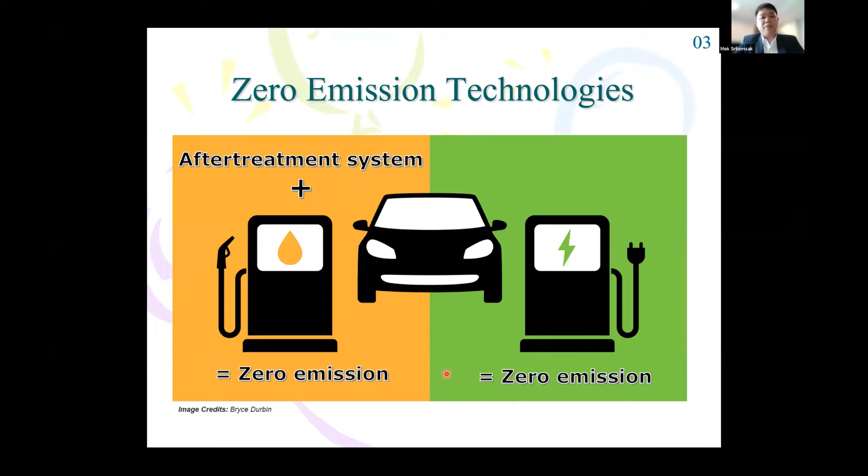And another way, if we want to keep using our internal combustion engine, we need to equip it with after treatment systems. Then we can obtain almost zero emission as well. So this is my point of view about this. Therefore, we come to talk more about the after treatment system that I mentioned. Internal combustion engines can be gasoline engines and diesel engines. But our group is more familiar with the diesel engine, therefore we decided to pick this part to share with you today.

First of all, the main emissions from the diesel engine. In addition to carbon monoxide and hydrocarbon, which can be treated, there are particulate matter, or PM, and nitrogen oxides. Another component in the diesel exhaust gas is rich oxygen content, because the engine is operated under ultra lean burn conditions, so oxygen is available in the exhaust pipe. For those toxic emissions, in developed countries like Japan or in Europe, there are many technologies available to take care of these toxic gases and particles.

This bottom left picture shows the full after treatment system, including the diesel oxidation catalyst, where hydrocarbon and carbon monoxide can be treated, and nitrogen monoxide can be converted into nitrogen dioxide, NO2. Another piece of equipment is the DPF, where black smoke or particulate matter can be trapped with 98 to 99% filtration efficiency, and selective catalytic reduction, where nitrogen oxides can be reduced into nitrogen gas and water using ammonia. And lastly, ammonia from the SCR can be treated using the ammonia slip catalyst, ASC.

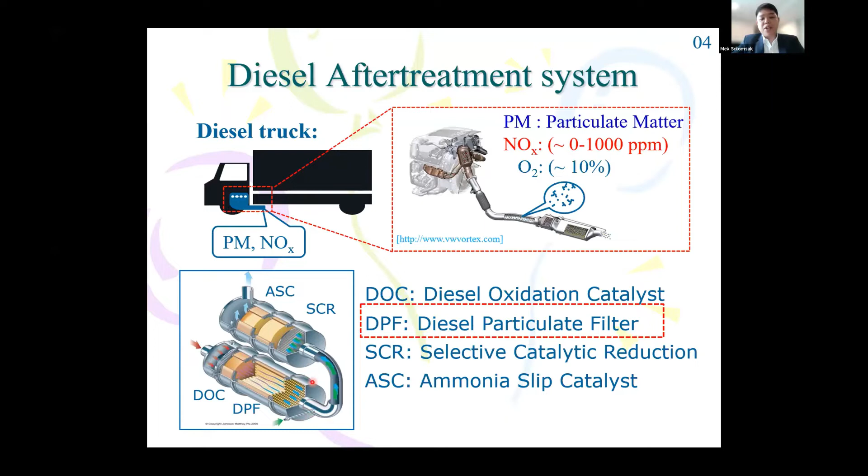To be more specific about the topic I'm going to talk about today, among the equipment, I will focus on the one we can use to reduce particulate matter emissions, which is the DPF. It stands for diesel particulate filter. It's located in the exhaust system of the diesel engine. There are two main steps of DPF operation. The first one is the trapping process, where the exhaust gas carrying the PM is forced to pass through a honeycomb structure of the filter with alternate end blocks, meaning that if one end is open, the other end is closed.

Therefore, the exhaust gas and the PM are forced to flow through a channel and through a porous media wall, and then the PM will be trapped on the wall. This is the trapping process. And after the filter is clogged, after being used for some time, the filter needs to be regularly cleaned through a regeneration process, where we increase the exhaust gas temperature and burn out all the trapped PM. The picture below is just a schematic diagram of the after treatment system I mentioned earlier, showing which gas is treated after passing through each device. I will just skip it.

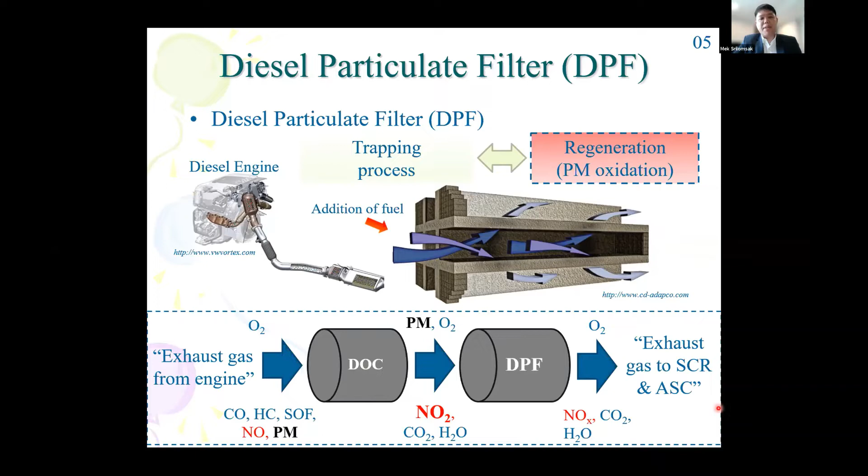But the current issues in DPF systems can be mainly two parts. The first one is ash formation clogging the filter after being used for some time. This ash is incombustible material, and after each regeneration burning the particles, it will accumulate at the end plug or around the surface of the filter. It will limit the service lifetime of the filter. So the movement of ash, or movement of the PM during filter regeneration, is to be studied.

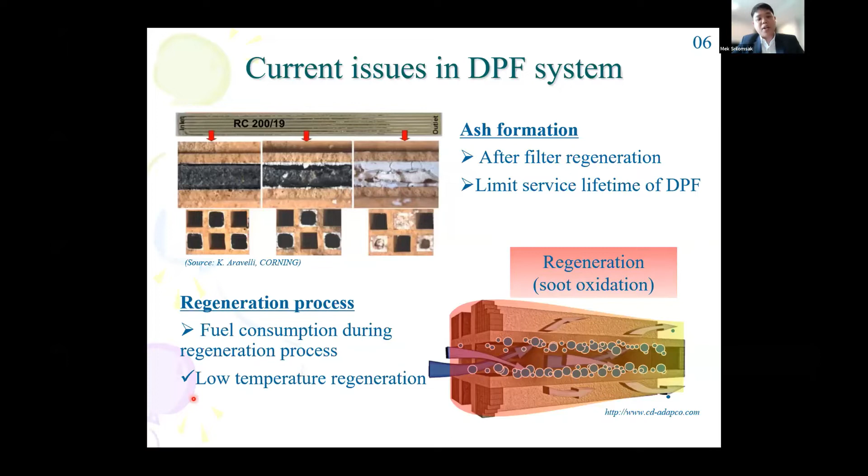Another issue is the regeneration process, which requires consuming fuel to increase the exhaust gas temperature. Therefore, fuel consumption is an issue, and a lower temperature of regeneration can be an interesting issue to be improved. So let's come to our research goals.

Our research interests have two main parts. First is the microscopic phenomena studies of PM regeneration, the PM oxidation or DPF regeneration process. Another issue is the relationship between each toxic gas. NO2 alone is toxic, PM alone is toxic, but combined they can result in PM reductions. I will show you, but probably we need to go quick.

This research was done when I was in Japan. We prepare a small size sample instead of using the commercial size DPF, because we want to study the microscopic phenomena inside. We prepare the small size sample like this, flow the exhaust gas through, and trap PM in each alternative channel.

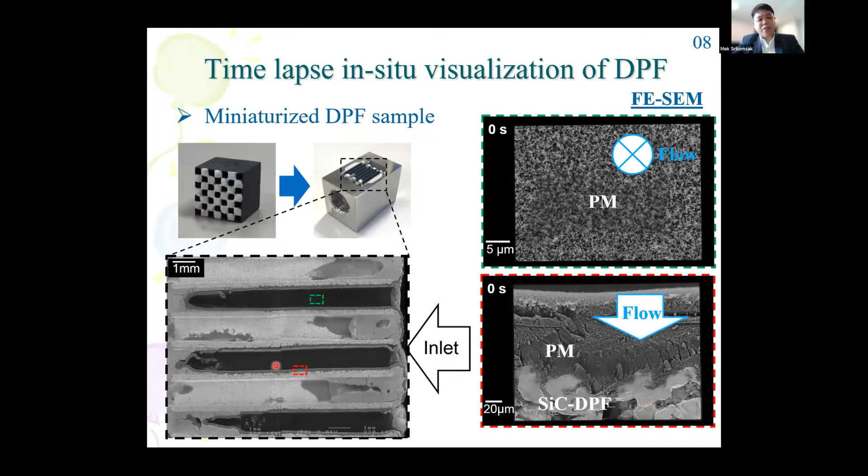Then if we use the scanning electron microscope to observe each channel, we can see the microscopic picture, shown on the right-hand side: surface view of the vertical wall, horizontal wall, and the lower one is cross-sectional view of the vertical wall.

I want to introduce some more information about the PM. This is about the hierarchy in length scales of the PM.

After we see the PM accumulated on the filter substrate like this, we zoom in more and can see the PM layers as a random shape. If we pick up the small particles and use the TEM to observe, it shows to be the...

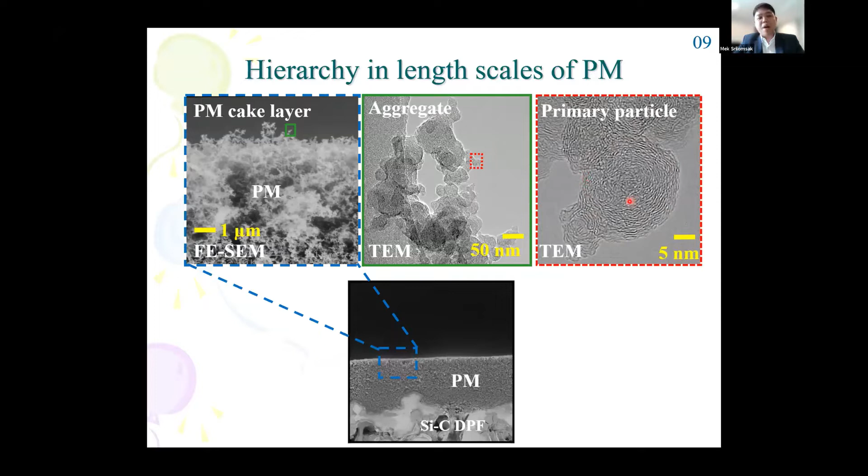Aggregate particles, nanoscale, look like this. And if we zoom in more in the red area, we see the smallest scale that can be defined as a particle, called primary particle. I just want you to get familiar with this hierarchy so we can show you more results.

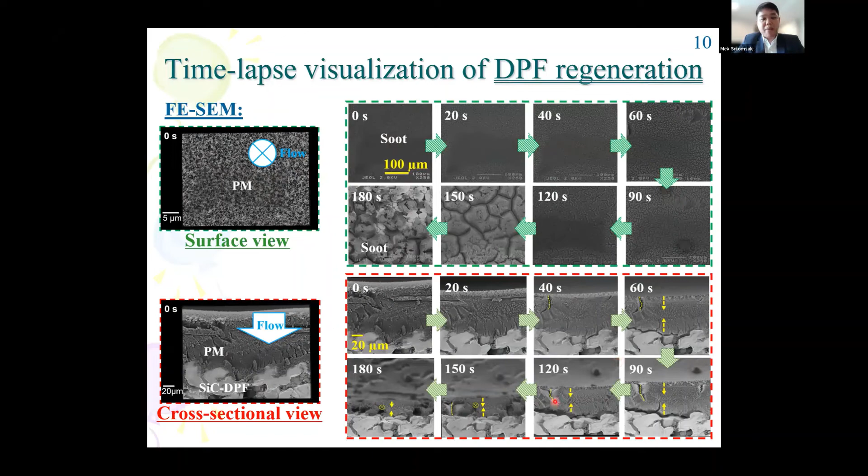First, we do the time-lapse visualization. We partially oxidize the PM trapped on the surface of the filter and see how it changes in the surface view and the cross-sectional view. I will go quickly and show you the conclusions of our studies.

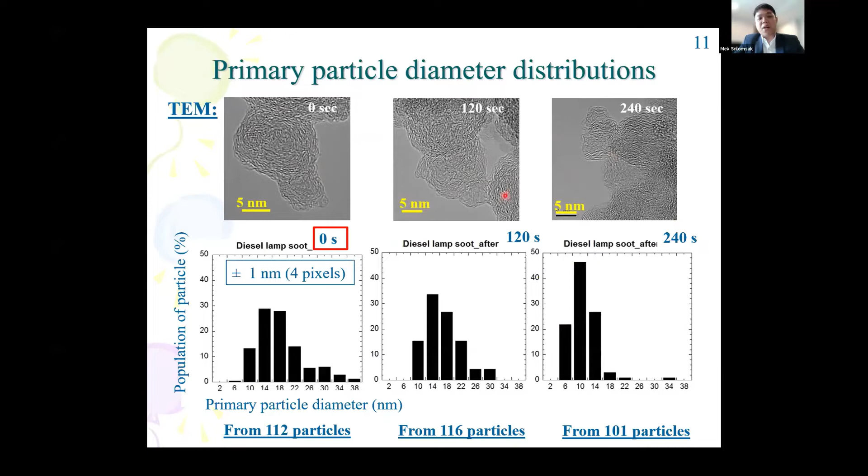Not only the microscopic scale in micrometers, we also pick up some primary particles to see the change after partial oxidation in the nanoscale. We plot the particle size distribution against the number of particles counted, and as a result, we can see that the particles tend to get smaller after partial oxidation.

This is the conclusion of our finding: after soot is trapped on the DPF, each primary particle tends to get smaller, which makes the aggregate get smaller, and makes the cake layer of aggregate accumulation get smaller. We call this the shrinking phenomena of the DPF after regeneration. So we can conclude that shrinking phenomena is a physical phenomenon that happens during the DPF regeneration process.

I'm not sure time allows, but I will try to continue a little bit more. We also made a finding to understand the relationship between NO2 and PM, using the concept of the Arrhenius expression.

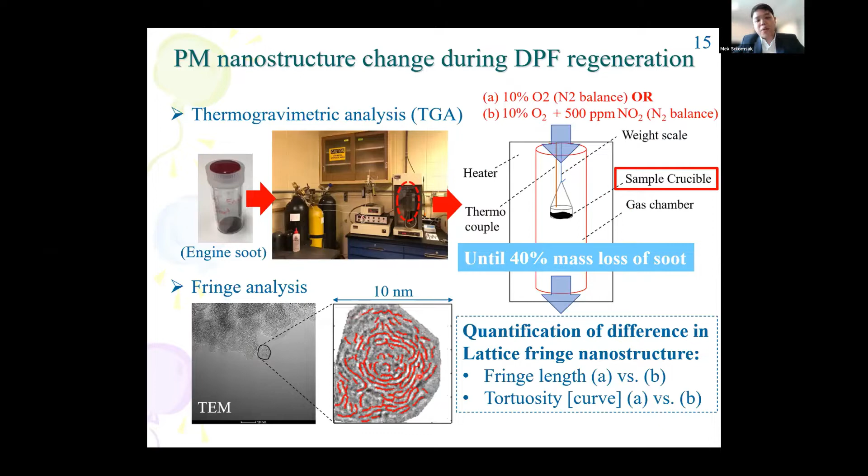We also propose a way to study the nanostructure change of the soot primary particle when we add NO2. I think the time is limited, so I will just go to the conclusions that we found.

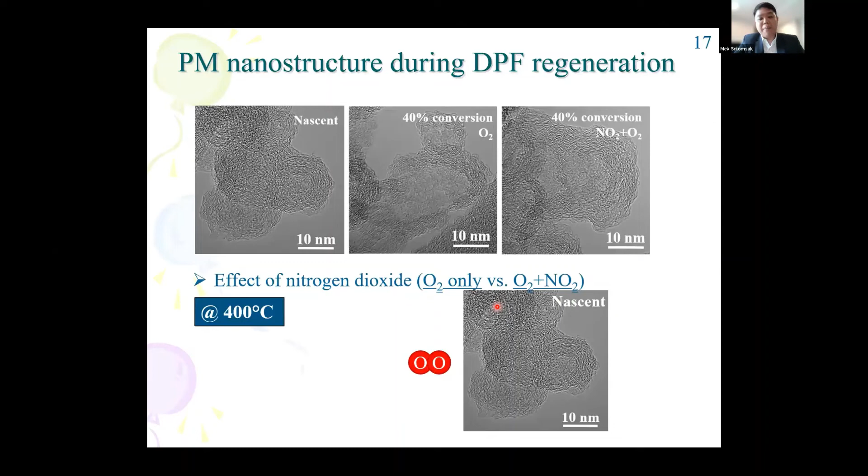I made this animation for the conclusions: if there is no NO2, oxygen tends to penetrate to the core of the particle and then burn out the primary particle from the inner side. Therefore, we can see a hollow structure like this, and this results in carbon dioxide.

But with nitrogen dioxide, it will make the edge of the primary particle more reactive. We have quantitative data for these conclusions. Oxygen will not tend to penetrate into the core, but instead oxygen tends to react with the shell of the primary particle, resulting in carbon dioxide. So this is our finding.

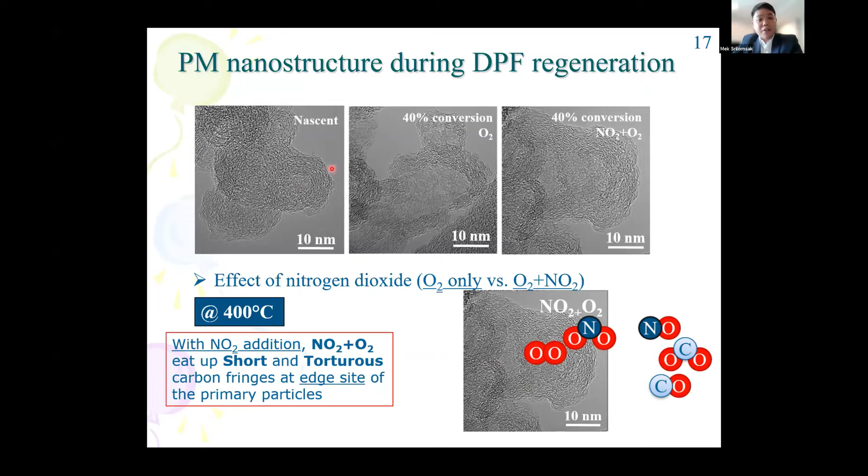We can say with NO2 addition, NO2 plus oxygen eat up the short and tortuous carbon fringe structure at the edge site of the primary particle.

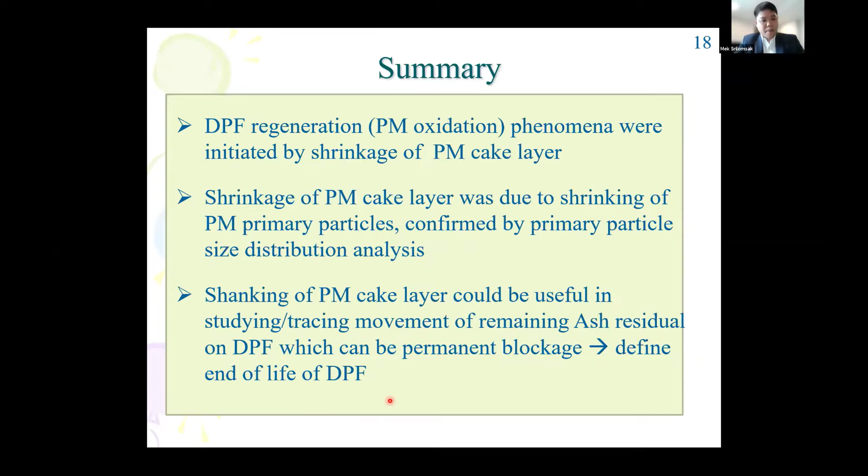So I will do the summary of my talk, sharing the idea with you today. I found that DPF regeneration phenomena were initiated by shrinking of the PM cake layer, initiated by the shrinking of the primary particle. The shrinking of the PM cake layer could be useful information for tracing the movement of the remaining ash residue in the DPF, which can define the permanent blockage, because the blockage of the ash can affect the service lifetime of the DPF. So if we know how the PM is moved, we know how ash is moved, and probably we can decide to make the blockage less.

Another summary of myself is the role of nitrogen dioxide on PM oxidation could be confirmed using the activation energy, which is chemical evidence, and another physical evidence is nanostructure change. So I propose that nitrogen dioxide plays a catalytic effect on PM oxidation at temperatures lower than 500 degrees Celsius, as chemical phenomena. The nanostructure change after adding NO2 was that the short and tortuous carbon fringe around the surface of the soot primary particle disappeared. Therefore, this is a physical phenomenon for the conclusions.

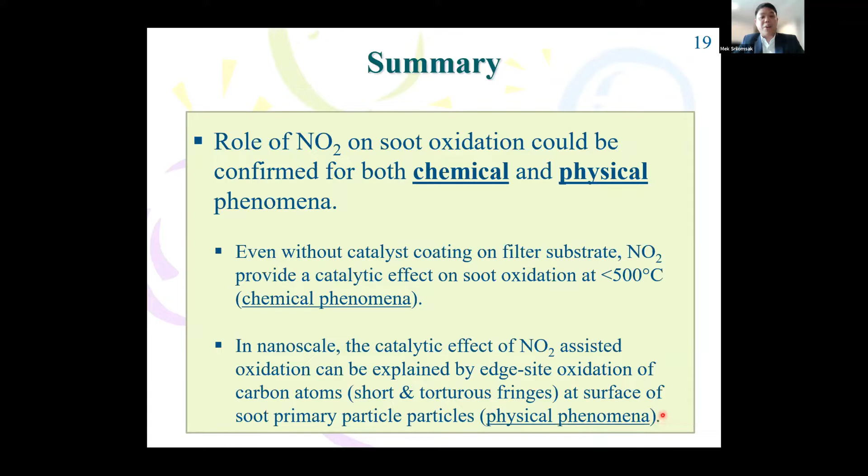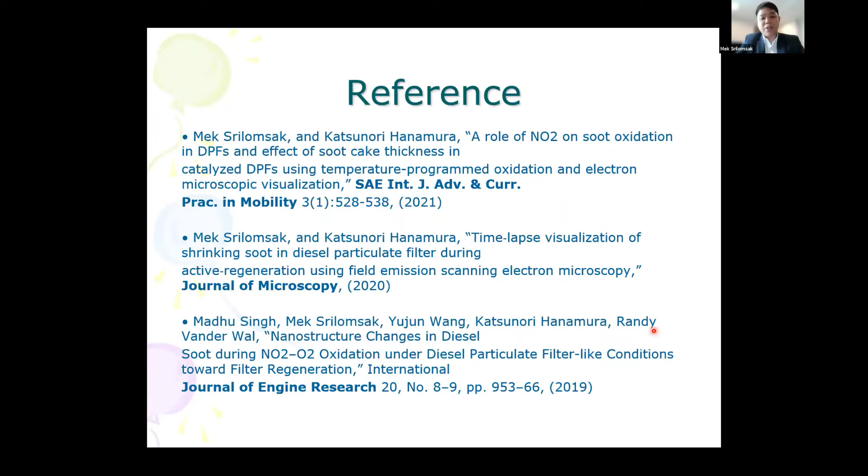Apologies for the too long presentation, but this is the last slide for the references of my talk, so you can find out more information from there. Acknowledgement for my laboratory in Japan, Hanamura Laboratory, Automotive Laboratory, my current laboratory, and also this is my contact. If you have any questions later after this presentation, just feel free to contact me. This is the end of my talk.

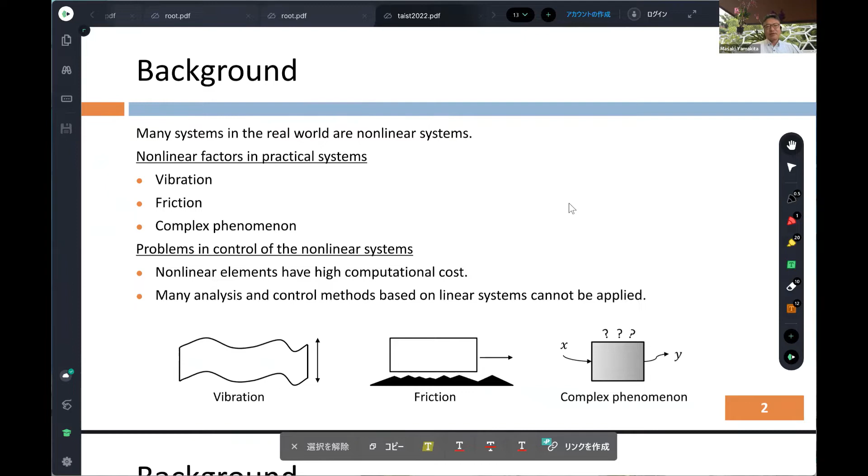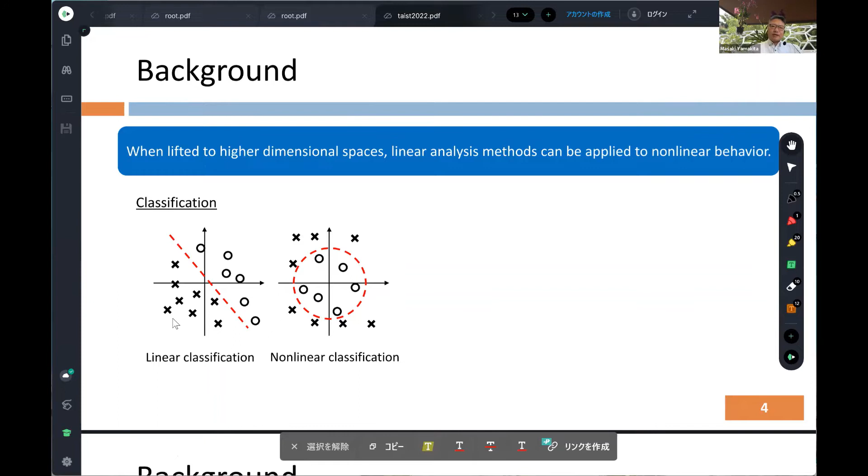But if we add a kind of distance as a third element of the data, we can have this kind of plot in the right-hand side here. At that time, in order to distinguish the two groups of data, we can use a hyperplane as shown in this figure. So from this example, we can learn that if we consider things in a higher dimension, things become easier, and the affine function becomes very useful to deal with the data.

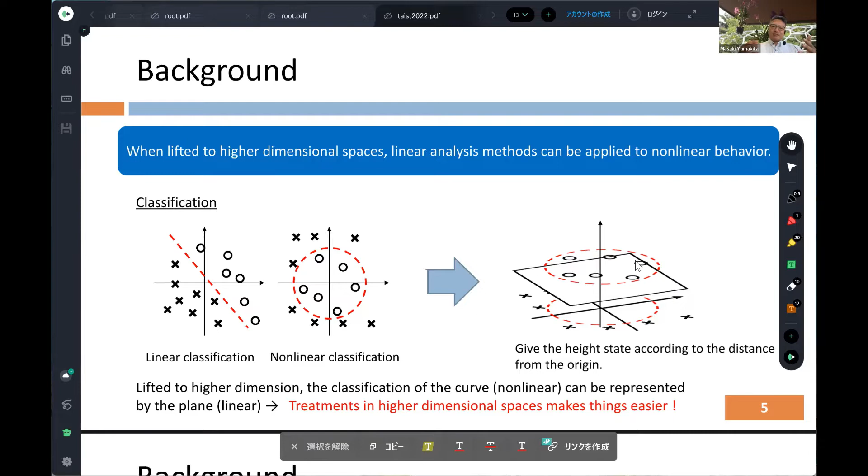If we consider the identification of the system, usually we want to have a low order system. But if we consider the behavior of the dynamics in higher dimension, things maybe become easier. The idea is not so simple.

Next, I want to explain about the dynamical system. Let's consider this simple discrete nonlinear system. The dimension is 2, and the state vector consists of x1 and x2. The dynamics is given by this equation.

If we add a new state, G3, as x1 squared like this, then if we consider the time advance of this G, G of k plus 1 is given by this right-hand side, and this can be represented by the further right-hand side, this one.

This right-hand side can be expressed as mu G1 and lambda G2 minus lambda G3, mu squared G3. That can be represented by the final right-hand side here, like this. This means that G of k plus 1 is equal to phi times G of k, and phi is constant. So if we add a new state variable, this dynamics can be represented by a linear time invariant system, LTI. This example shows that.

So if we consider the dynamics of the system in a higher dimension, maybe the dynamics can be represented as a linear system. We call such a linear system representation of the approximation a lifting linear representation or approximation.

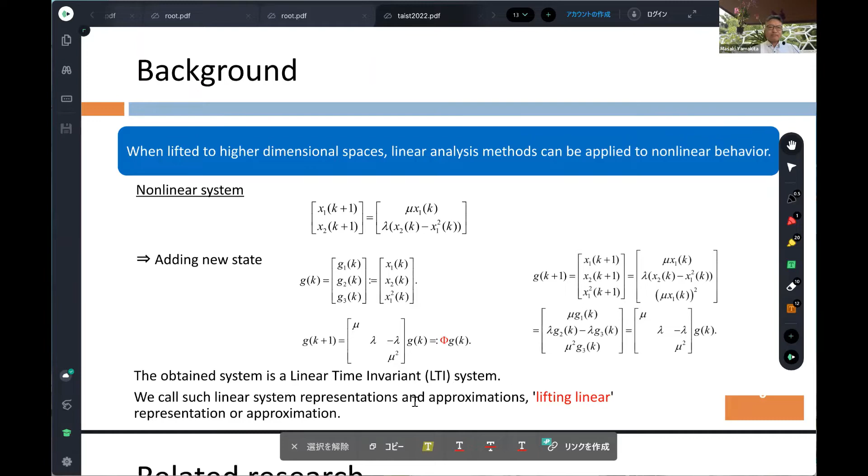And if we can have that kind of linear representation of the nonlinear system, we can apply the methods for linear systems. Maybe we can define the oscillation mode of the nonlinear system, and we can utilize the design methodologies for linear systems for the nonlinear system.

Also, nonlinear model predictive control is converted to linear MPC. And if we can use linear model predictive control, we can attain fast computation, and we can attain global optimization. Also, if we want to apply stochastic nonlinear model predictive control, it's very hard to solve for the nonlinear system, but it's easy for the linear time invariant system. As in this example, if the system can be represented as a linear system, we can have many advantages.

This kind of idea actually is not new. In 1931, Koopman showed that if we embed the dynamics of the nonlinear system into the infinite dimensional space, the behavior can be represented as a linear system. So Koopman showed that kind of fact almost 100 years ago.

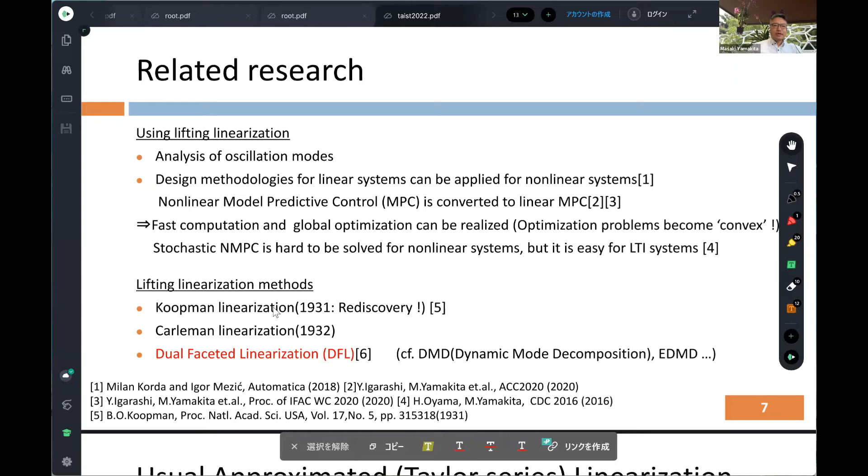And we rediscover that kind of nature maybe after the year 2000. And nowadays, this kind of lifting linearization is a very active research area in the control community. And there are several methods for the lifting linearization. And one is dual faceted linearization. Maybe I don't have enough time to explain the details of the dual faceted linearization. But this is the usual approximate linearization using the Taylor series expansion.

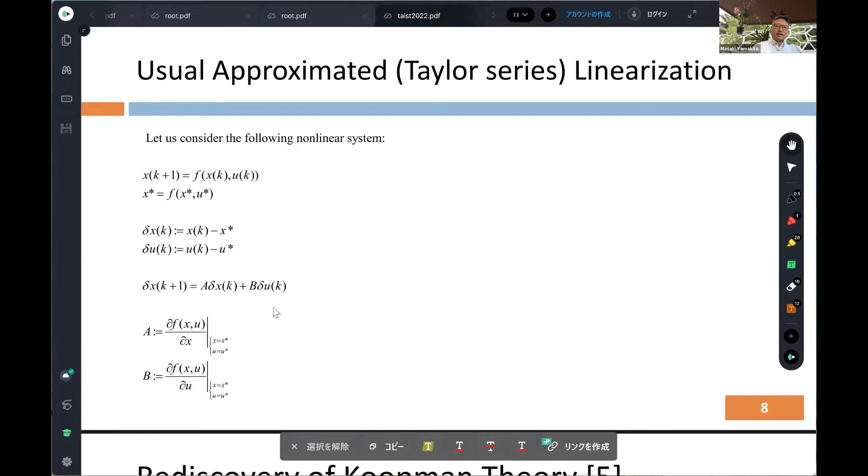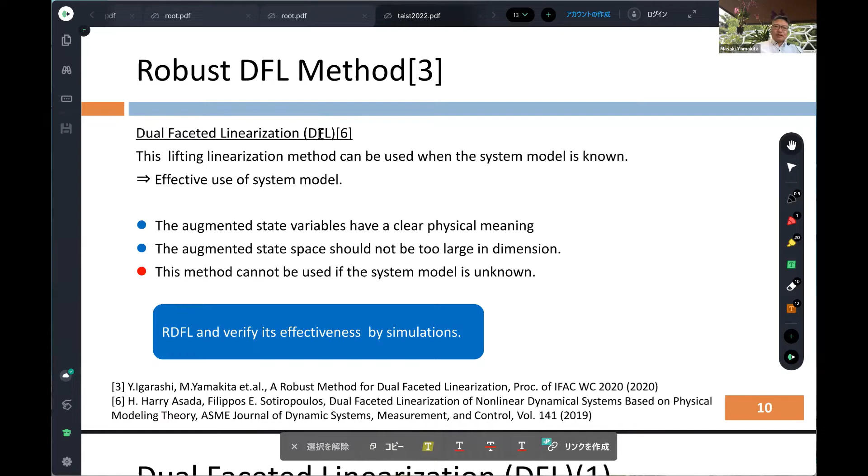But instead, if we consider the Koopman operator U, which is defined by this equation, for this kind of nonlinear system, then we can show that this Koopman operator has linearity for the nonlinear system. And Asada from MIT proposed dual faceted linearization for the lifting linearization. In his method, he utilized the natural linearity of the physical system, and also he employed the nonlinearity of each element as a second class of state variables.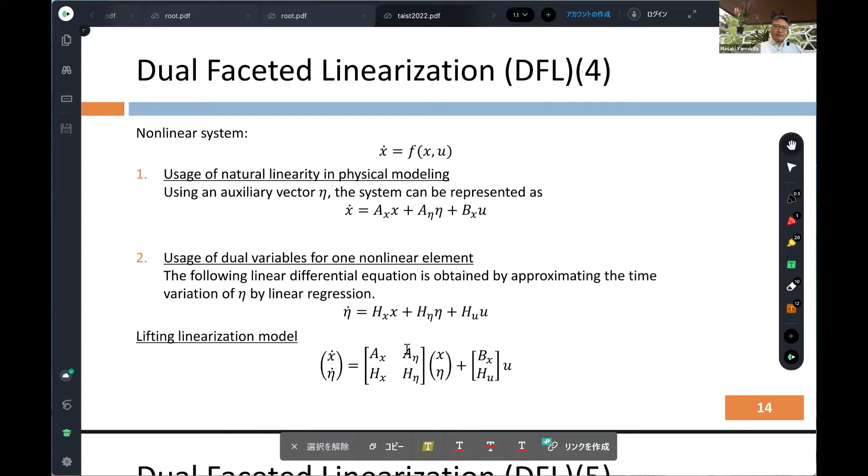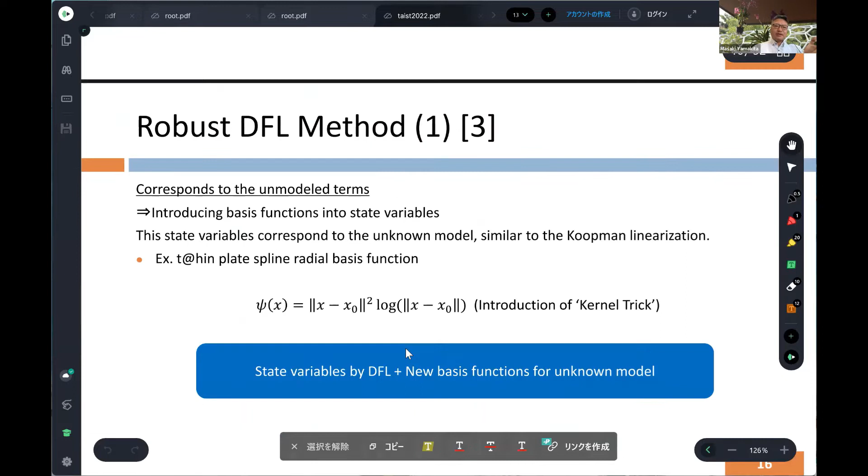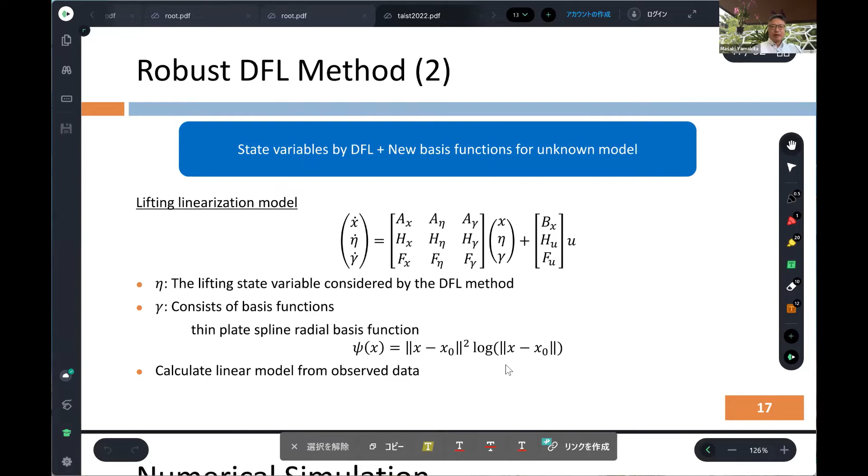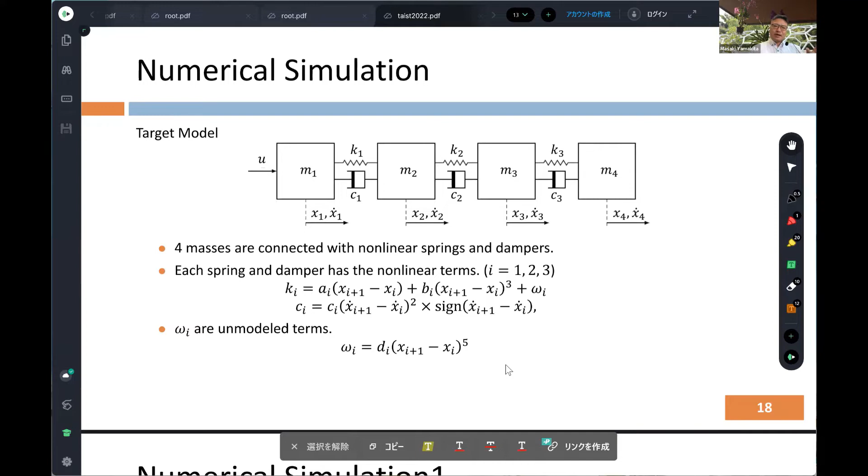So we extended this DFL as a robust DFL. We introduced a third kind of state variables, which consist of this kind of thin-plate spline basis function. That is a kind of introduction of the kernel trick. And then the system can be represented as this linear time-invariant system, where gamma is the set of the third class of the nonlinear state. And if we apply the robust DFL to this kind of nonlinear spring system, we can accurately predict the behavior of the system by the LTI expression.

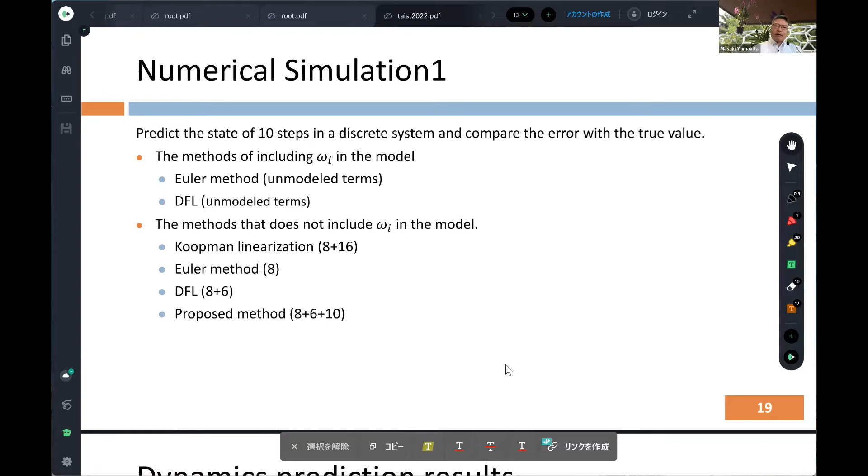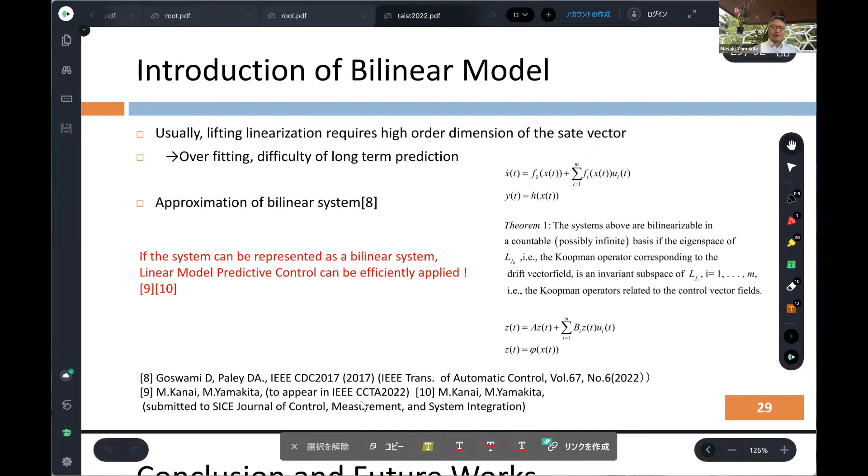Okay, so I want to jump to the conclusion and future works. I briefly introduced lifting linearization in this presentation. Then I showed the effectiveness of lifting linearization for the discharging or charging of electric vehicles whose size is 30,000, which is a practical situation. I also mentioned that if we use a bilinearization of the nonlinear system, we can easily apply linear model predictive control to the nonlinear system.

Future work should include verification of the effectiveness or robustness of this lifting linearization for real applications. We should also improve how to select the auxiliary variables, the added state variables.

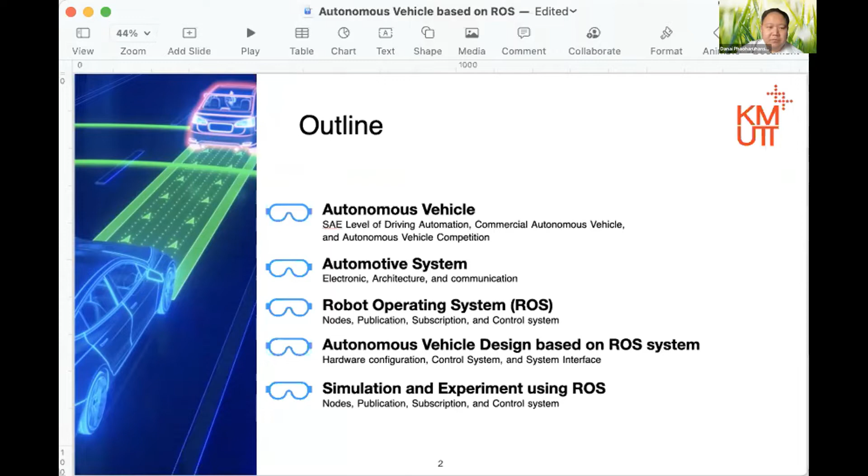At first, I think many people know about the autonomous vehicle, and it's becoming a reality. Nowadays, the Society of Automotive Engineers has published the SAE levels of driving automation from level 0 to level 5, which define the level of an autonomous vehicle relative to the ability of its autonomous functions. For example, at SAE level 0 the vehicle only has warning systems, such as automatic emergency braking, blind spot warning, or lane departure warning.

To perform autonomous functions, the vehicle requires a specific control system and extra equipment to measure the environment, such as 3D LiDAR, IoT devices, and other environment sensors. An autonomous vehicle has many control tasks, so it's very difficult to develop in one program, which leads to methods that split each control into small parts and combine them later.

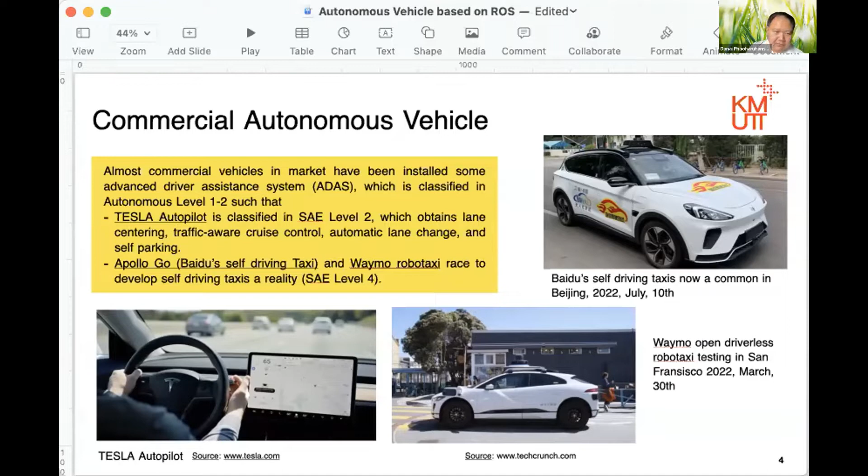Since 2014, the Formula Student competition has started an EV competition for driverless vehicles. Next is the Indy Autonomous Challenge, held since 2018. This challenge develops Formula-style vehicles to compete in speed and performance as autonomous vehicles.

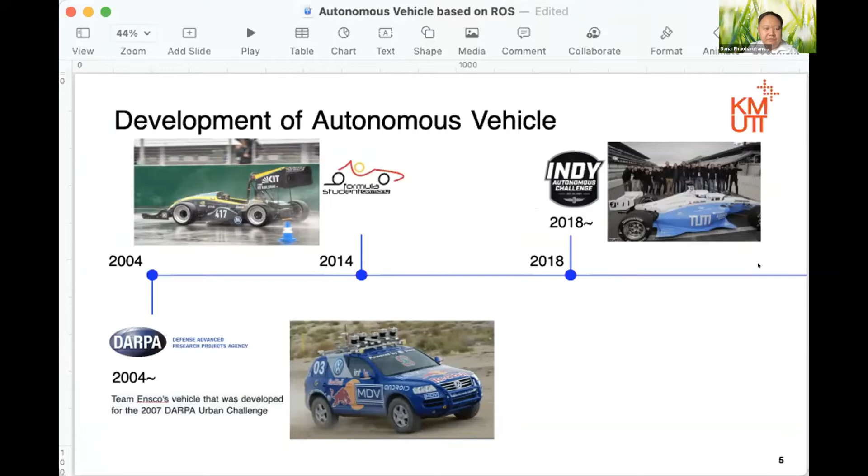If we look at the architecture of an internal combustion vehicle, or ICV, it contains several devices in order to operate the vehicle, such as the engine ECU to control the engine, the transmission ECU to control the transmission system like a gearbox, and acceleration pedal control to check the status of the acceleration pedal.

This is grouped as the drivetrain system at the lower part, this one. The drivetrain system communicates by CAN bus. Another one is for chassis control, like window lift control, mirror, or door module, which also communicate to see the status and perform under CAN bus communication.

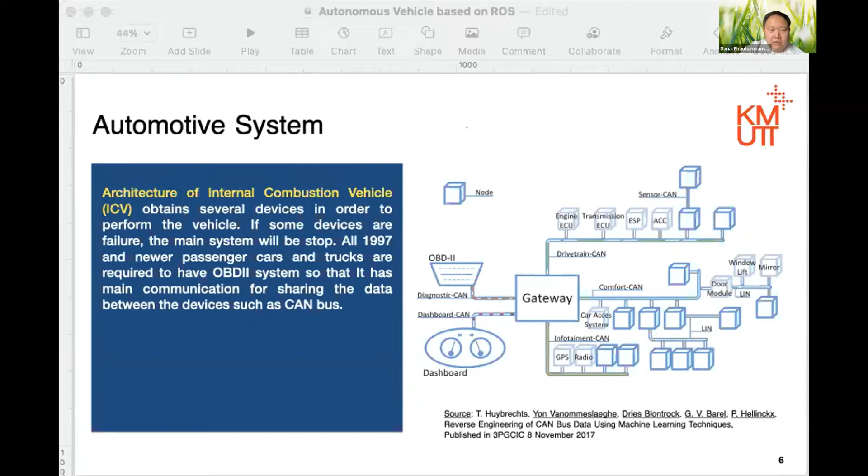If we compare this with ROS, or Robot Operating System, it is very similar. In ROS we have the ROS master to register the names of the ROS nodes, and a ROS node represents a subsystem in the robot or vehicle, and each node communicates by messages. The message is like CAN protocol, and other protocols are also supported.

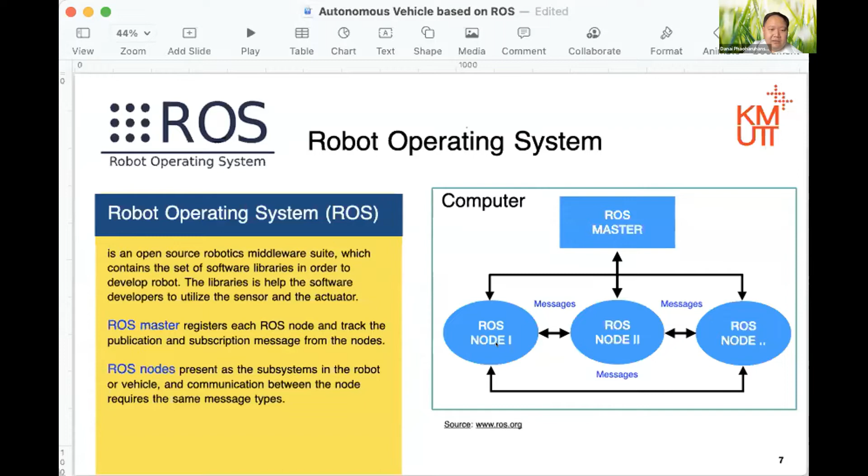Then, to design an autonomous vehicle using ROS, we can see the conventional type of autonomous vehicle, for example an autonomous vehicle developed based on an internal combustion vehicle in 2007. Several sensors such as stereo camera, GPS antenna, 2D LiDAR, and IMU, and actuators like electronic throttle, electronic steering, and electronic brake are installed on the vehicle.

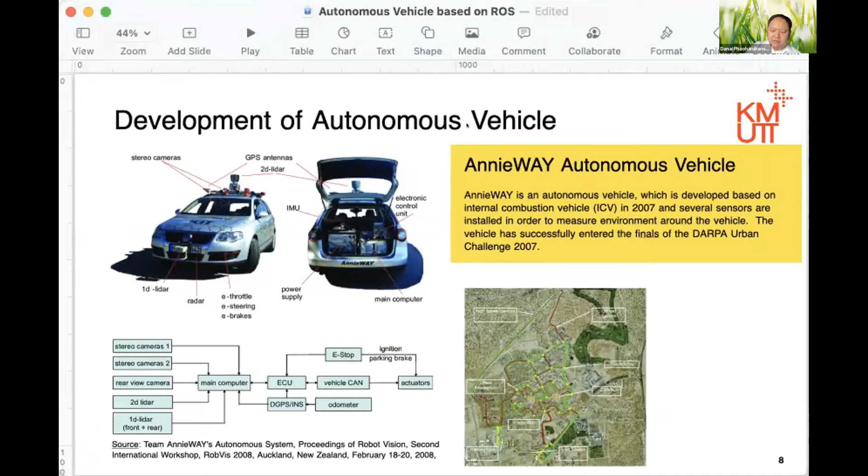If we look at just the main task, driving the vehicle on the path that we decide, with the conventional navigation control system like this one, we have a desired path as the input, a motion planning system to plan the motion of the vehicle, and we observe the vehicle's position from the localization system. After that, data is sent to trajectory tracking control to derive the input to drive the hardware control like the ECU and drive the vehicle.

So the vehicle moves, and the sensors receive data and feed it back to localization again. This is only a general, conventional navigation control system for a vehicle. If there is obstacle avoidance or other things, the control system is more complex.

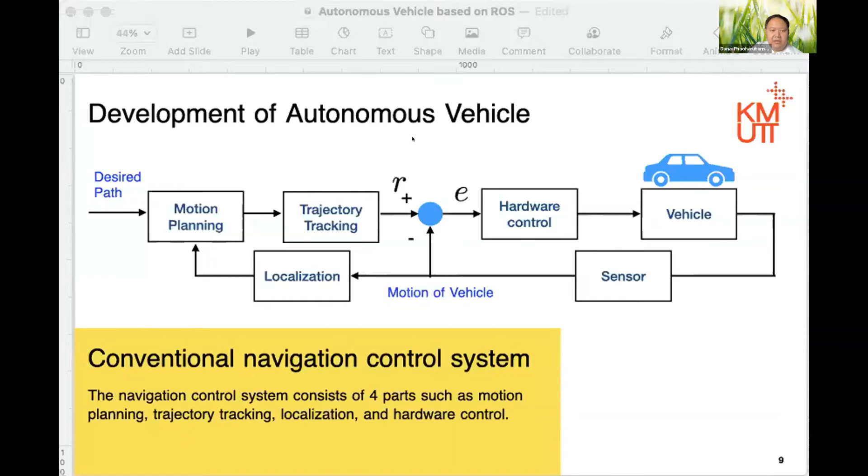So the system can be separated into subsystems, and many developers in computer engineering or computer science focus on the upper block like this one. So nowadays many developers focus on algorithms for navigation and tracking, and algorithms to decide the path of the vehicle and more intelligent functions, which are developed on the upper block.

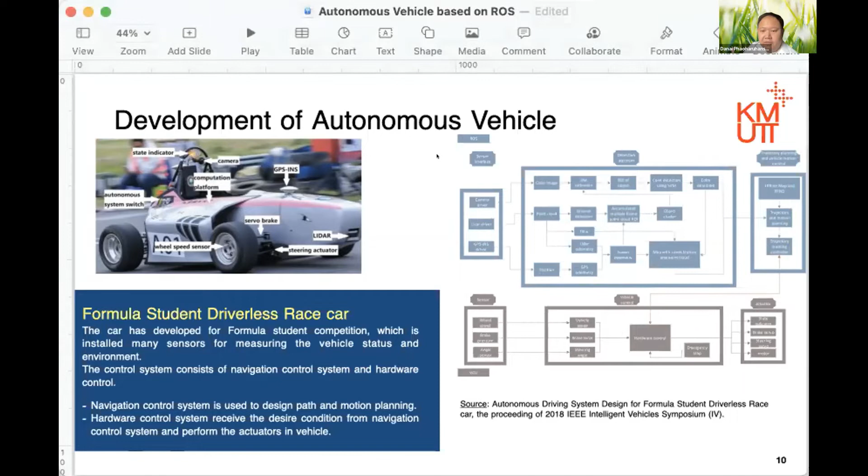Next, the architecture will be separated into subsystems. Generally we separate out the vehicle node, which is a ROS node. Inside it is a control system for steering and powertrain, and a sensor module to get vehicle information and feed it back to the intelligent nodes, such as trajectory tracking, path and motion planning, localization and visualization, as sensor messages or geometry messages.

After processing in the intelligent system, it feeds back to the vehicle node again as a command message to perform the motion of steering and powertrain.

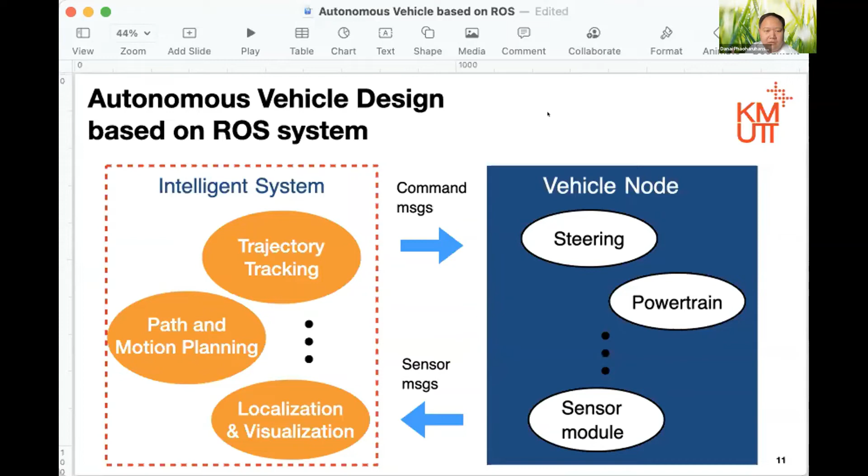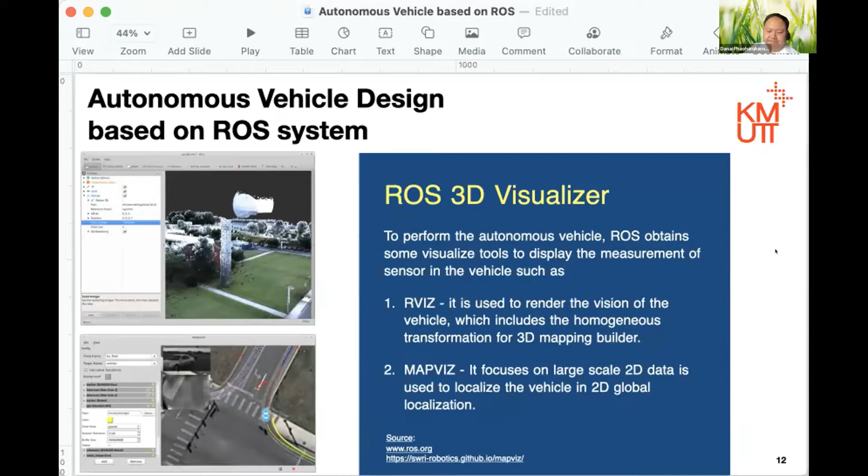And then to the simulation or experiment. If we try the autonomous vehicle using only experiments, it is very dangerous. So we want to simulate the motion in a virtual environment, like using the RViz package or other third-party software like CARLA. CARLA is a software simulator.

It can couple with ROS through specific messages between the CARLA program and the ROS program. The program can publish and subscribe to ROS messages. This can be used to import data from the visual sensor in the CARLA simulator and feed it back to ROS in order to operate the vehicle. And I have two cases.

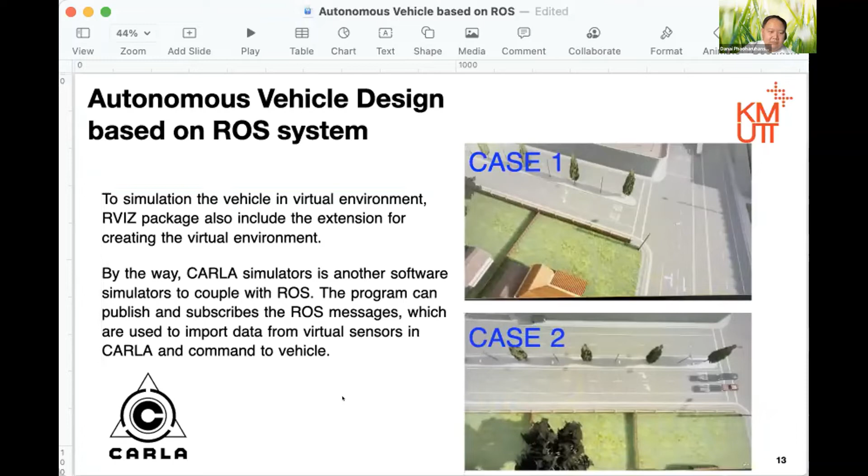Yes, this is all for my presentation. I presented the similarities between the vehicle system and the ROS system, and introduced some ROS packages in order to practice and simulate the autonomous vehicle.

So in summary, the advantage of the ROS system for autonomous vehicles is that it has a lot of libraries for autonomous vehicles: we can access the sensors, pre-process to reduce noise, combine sensors as sensor fusion, and it's easy to connect to the motor controller or other microcontroller units. It also has visualization tools to monitor the vision of the vehicle in a comprehensive manner. That is the advantage, but there is also a disadvantage when we separate the system of the vehicle.

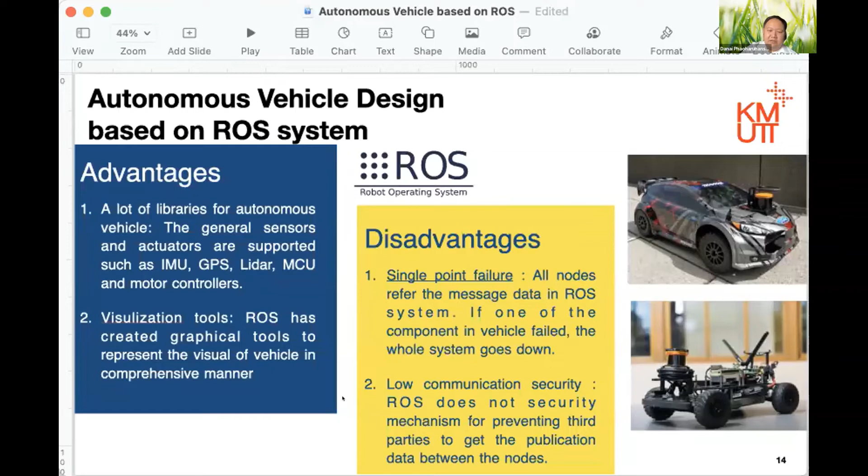If one node of ROS fails, the whole system goes down, and the communication package of ROS is standard, so everyone can access the data. So it has low communication security. Okay, that's all for my presentation.

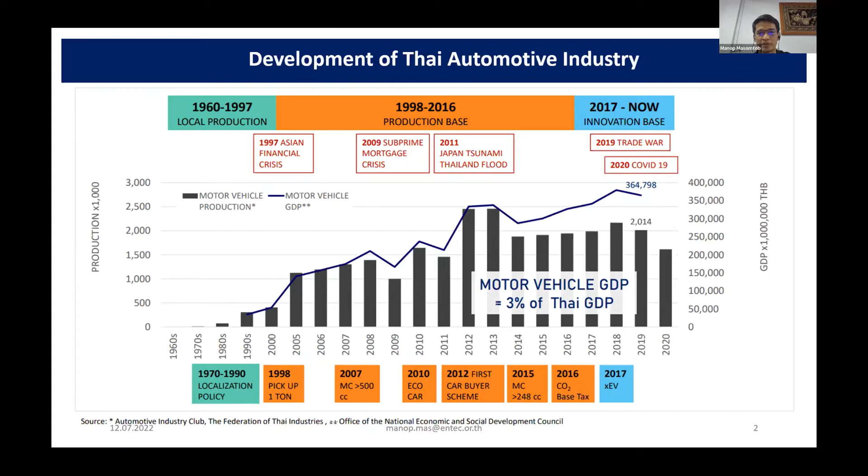E-car, we have the FTA issue. Thai companies are not interested in the e-car section due to the FTA between ASEAN and China. Import duty 0%. And if we talk about the e-bus, many companies try to build the e-bus. Some companies are using an aluminum body to reduce the weight of the bus. This means for the e-bus, we use a small battery pack, and the price of the e-bus is cheaper.

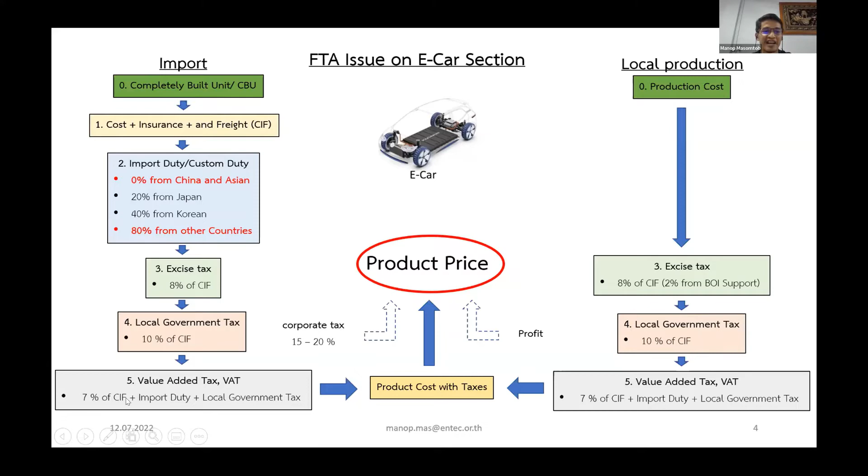The customs duty is really important. As I showed on the last slide, it's 20% when we import the car from Japan, so you have to pay more than 200,000 baht in customs duty. But from China, 0 baht, and for the product in Thailand, 0 baht. And then for the excise tax, multiply the excise tax like this, with no customs duty if you import the car from China.

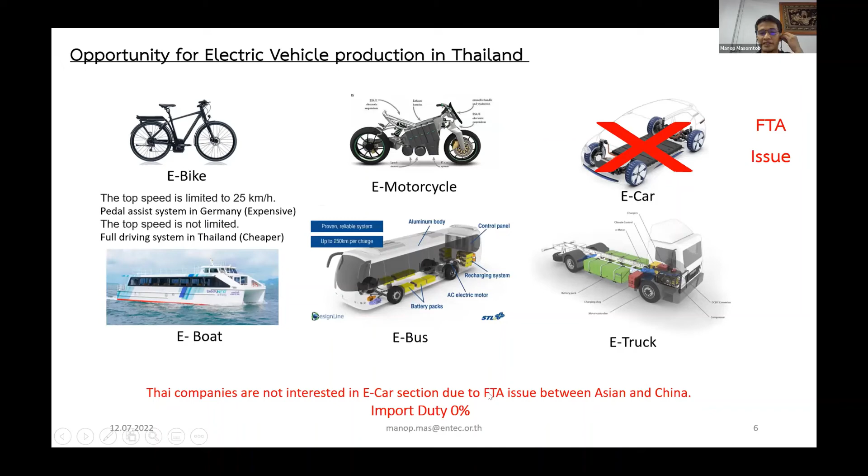This is the reason why Thai companies are not interested in E-car. E-car means a sedan car, SUV, or hatchback, because of the import duty being 0%.

So how can Thailand survive? How to transform electric vehicle technology in Thailand? In the private sector, private companies try to transform their own business from ICE products or ICE parts to EV products. For the EV technology, it looks like you can import smaller batteries from different countries and then assemble them.

In Thailand, this means we have many startup companies opening, and also DIY like a hobby. For the government section, the government has many policies to support Thai industry, and also to support buyers to buy new electric cars. And for the research center, to support Thai industry for EV product development.

And for technical colleges and universities, try to increase students' knowledge about EV technology. And for the standard testing institute, try to invest in many equipment to test the product parts from Thai industry for safety and also for international standards.

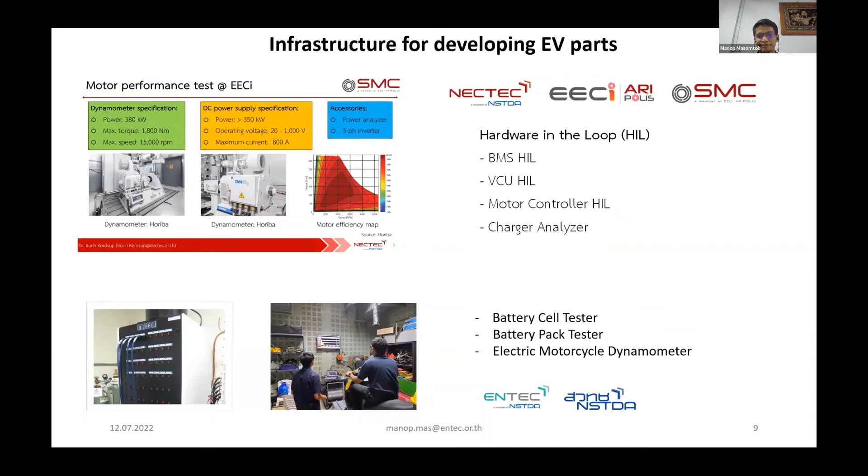This slide shows our research areas in my laboratory, and I have about 4 areas. The first area is the cooling system, the second is safety, the third is production, and the fourth is the EV system.

For the cooling system, we try to find a new technique to estimate the heat generation from the battery cell. Why would we like to know this? We cannot design the cooling system if we don't know exactly the heat from the battery cell. After that, we do research on air cooling systems, liquid cooling systems, and also refrigerant cooling systems.

For safety, nowadays we focus on lithium battery fire suppression. You have to understand that there have been a lot of accidents from lithium battery fires. So we work on the battery thermal runaway prevention system, with IMD leading from the battery pack to the car body.

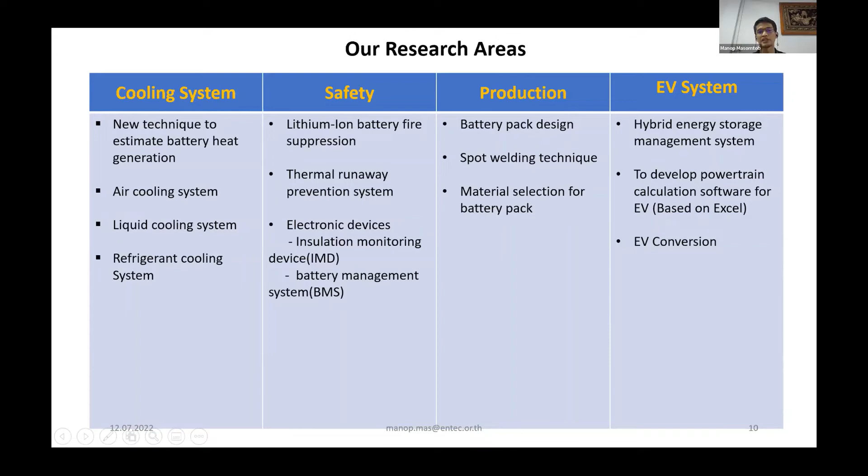This slide shows some part of our research. When you see the green box, this is the electronic device: BMS, master BMS or MCU, the IMD and VCU, all of them are in the green box as electronic devices.

NSTDA collaborates with the ECU shop to build the product. The product should be cheap; we don't want to import this product from another country.

Because if we import BMS or master BMS from another country, it means when we would like to modify the electronic device back to that country, it's really take time. Maybe the company in another country will know the secret knowledge of the battery manufacturer in Thailand and also car manufacturer in Thailand. And then we try this, this is a prototype.

I think it's not over. Next year we will have the commercial product. We finished building the prototype already. Not only about the BMS, we have to build the BMS tester because we need some device to test our BMS. And also the ECU shop developed the VCU and HMI to indicate the system between the battery pack and the motor controller, and also maybe the system.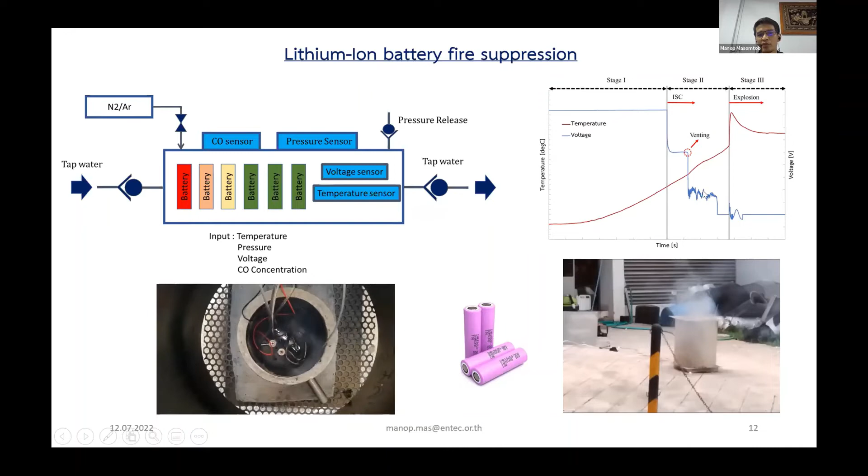Only single cell. The temperature of the battery is increased until about 100 degrees Celsius, and then the voltage of the battery drops quickly. Then we wait until about 120 degrees Celsius. Some gas begins to come out from the battery cell here. For this zone, it looks like thermal runaway. And until 180 degrees Celsius, the battery cell explodes.

And then we try to find the way how to stop the fire due to the battery cell explosion. This picture just shows the damage, only one cell. This cell can transfer the heat from the first cell to the second cell, third cell, and fourth cell. It means this cell can make the second cell heat up, and then the second cell can explode. And then after that, the third cell will explode.

And then how can we stop that? We try to install many sensors like the temperature sensor, voltage sensor, pressure sensor in case the battery pack is a closed system. And also we install gas sensors such as CO, maybe hydrogen sensor, to monitor when we have some gas from the battery cell.

The first step, we know that if we have some gas, it's like fuel. When the fuel mixes with the oxygen, we have some heat, and the inside can look like a combustion starter, so we feed nitrogen or argon to remove the oxygen first. And then if the battery cell still burns, we feed water to the battery pack.

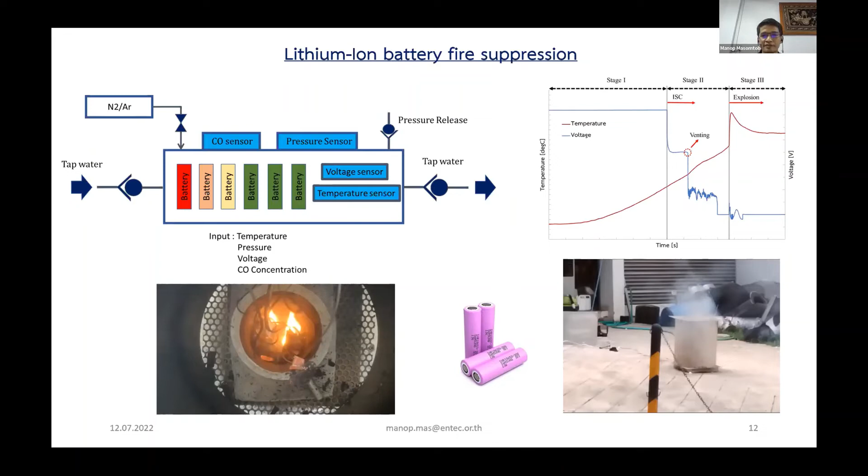Okay, for the last slide, for the EV conversion, we talk about EV conversion. It's not a new electric vehicle.

We have used this logic. If we have a motor with dual drive, rear and front. For the front, we can use it to drive the own system, like the auxiliary system, to drive the compressor for air, to drive the steering pump, to drive the water pump. Because it means we can keep the own parts, we can reduce the cost for the EV conversion. If we have only a single shaft, we can make a link from the shaft to the front, and then drive the own system again.

But another way, you can use two motors. The big motor, or first motor, you can drive the gear, and then use this motor to drive the car. And the second motor, you can use to drive the other auxiliary system.

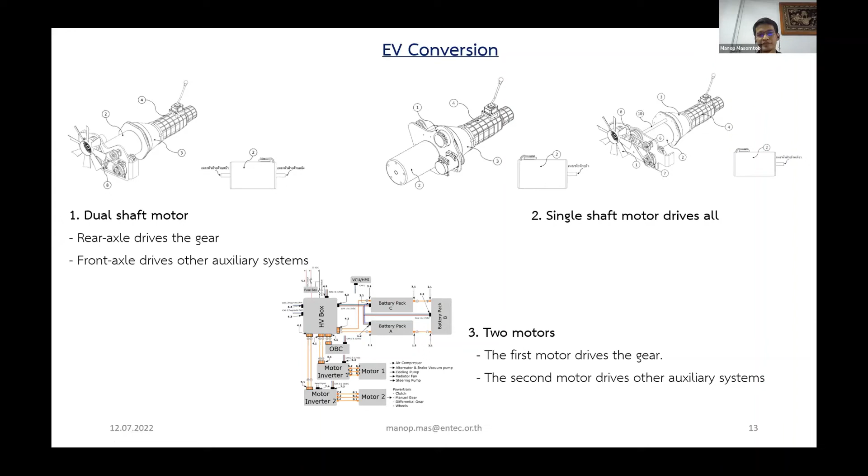That's all of them of my presentation. Thank you for your attention.

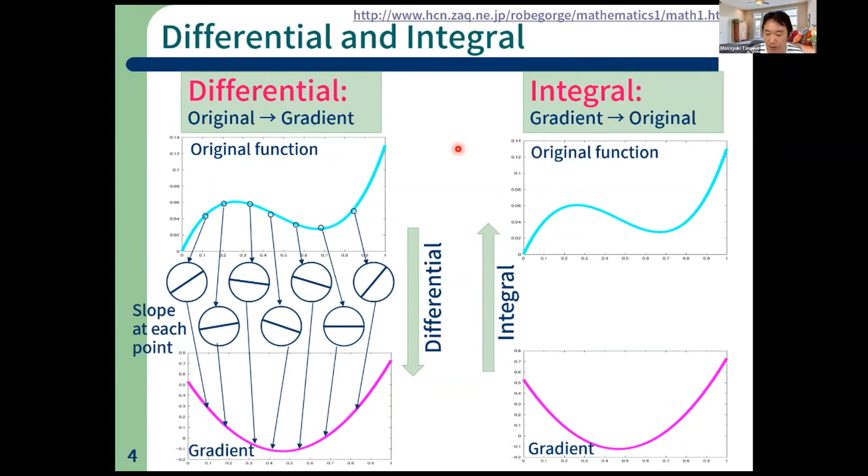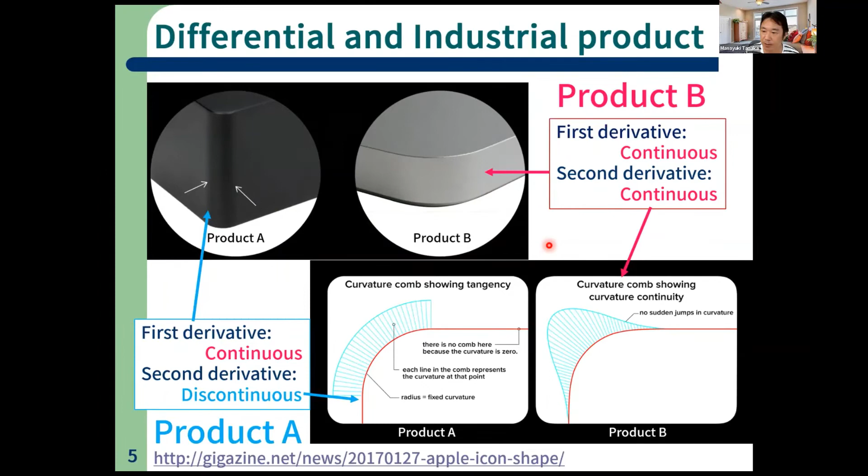While product B has a good property, both the first derivative and second derivative are continuous. That's why we cannot see the border. Maybe many people think product B looks better. So differential or gradient information is also related to industrial products, I think.